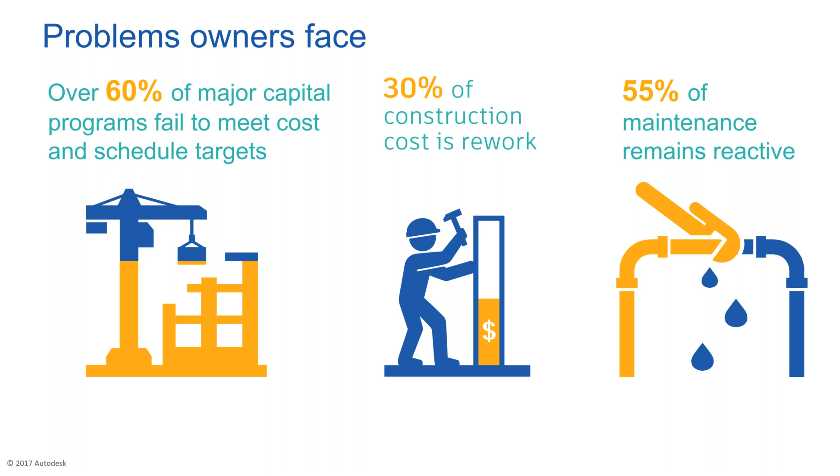So again, embracing BIM as a technology is giving us a lot of benefits. The first and foremost step towards BIM would be developing 3D models. Whether it is data capture, conceptual design, detailed design, or documentation for construction that reaches out to the site, it needs to be based out of a 3D model, because you cannot go wrong with a 3D model. So ideally, you have to embrace technologies such as reality capture and conceptual modeling tools to save a lot of time and money.

And the advantage for all the stakeholders of the project is once you start off your foundation as a 3D model, it gives better project insight. What a 3D model essentially gives as a byproduct is its cost, and you can also link time to it - you can timeline it for better schedule and constructability. Once this has been identified and concretized, the project can go on with a lot more predictability.

And what happens is, all through the project, the users are using the same kind of consistent data throughout the project. So there is no to and fro between the stakeholders with respect to project data itself. And time-boundness will be the norm of the day. If you see BIM projects, the way people are collaborating with each other, you can assign specific responsibilities to specific people to invoke prompt responses, so that there is no time lost.

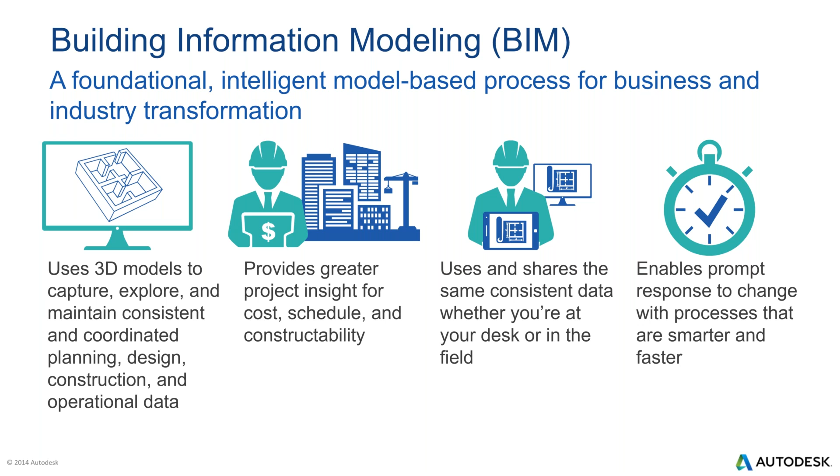So how does BIM empower the owners? Using BIM, you can improve the infrastructure quality. Most of the building systems have come into the BIM bandwagon. Many of them have got BIM mandates, so infrastructure is quickly catching up. We have seen many projects that have been started on BIM, airport projects, railway projects, even highway projects, being cited as BIM for infrastructure projects.

So for the predictability aspect of it, and to significantly reduce infrastructure lifecycle costs, as I already said. When you save a lot of money in terms of costing, timelining, and predictability of the project, you will also have better lifecycle costs as well. Many of them felt that they understood the project better right from the inception, well towards the end, and they could trace what's going wrong and make quick corrections.

Operational efficiencies as well. When it comes to the maintenance phase, people felt that having BIM models really helped them a lot in terms of maintaining the overall project. So overall, there's a lot of transparency, efficiency, and the quality is maintained when you embrace the BIM workflow.

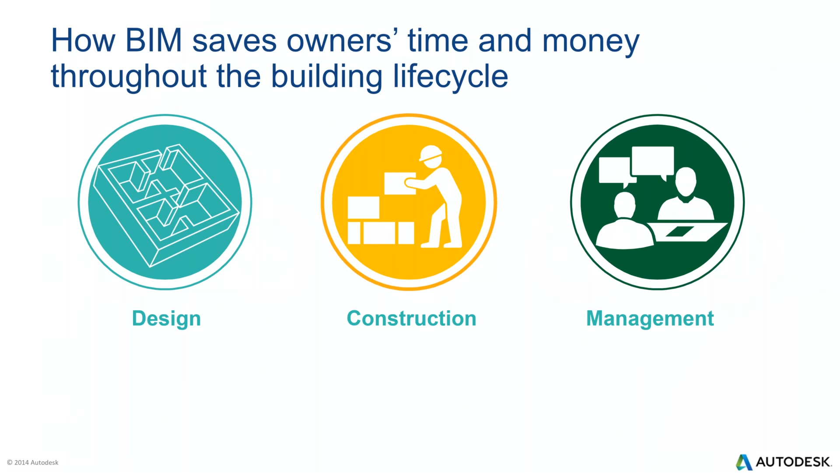So at the conceptual stage itself, what is the biggest advantage? Now, from an infrastructure standpoint, many of the contractors, design consultants and architects are using the power of InfraWorks. InfraWorks has the capability to quickly generate design options so that clients can take quicker decisions. Public opinion can also be quickly taken even before the project starts off. More often than not, we've seen the project getting delayed owing to public outrage or decisions taken by the clients or owners themselves. So this can be reduced a lot at a concept stage itself.

I suggest you embrace InfraWorks right from the word go, because it gives you better in-context visualization.

Coming to sustainable design as well, it doesn't only apply to buildings. It is a misconception to think that sustainability is only meant for buildings. No, sustainability can also be reflected in infrastructure projects. For example, if you have a lesser number of structures, or you have optimized materials, you're already sustainable. So if you plan well enough to avoid green spaces, or to avoid urban settlements, you're already sustainable.

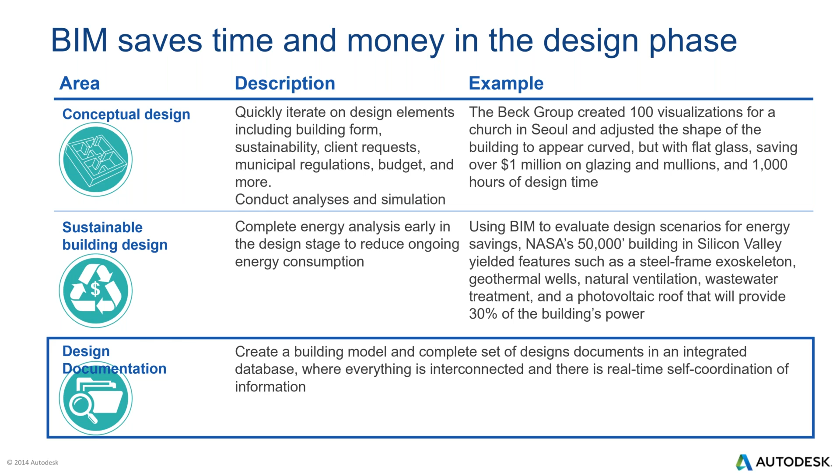So for construction as well, even before construction, what happens? A contractor takes into account the constructability of the design itself. He will go through a set of brainstorming sessions - whether the design is right, is it constructible, are there any complications on site. If there are complications on site, he will need to inform the designers, or in most cases it may be the EPC that is in charge. Communication should not go amiss along with project constructability.

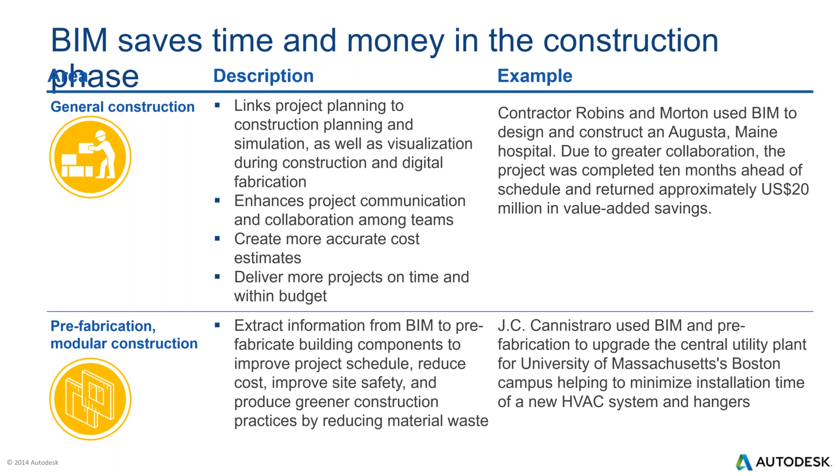And life cycle costs - say for example an infrastructure project, a township project has come up, and they want to extend the township project to a larger area. The classic example would be Chandigarh - its plans were extended into cities like Mohali and Panchkula. What if the data was already there with the designers? It would make their life so much more simple. So after the city model reaches a maturity level, it needs extensions or improvements, and this can be reused. The data produced in the first phase can be reused for remodeling and new modeling as well. So overall, the USP is to have a base 3D model right from the word go, right from the survey and conceptual design stage.

So what is the ROI, the return on investment on BIM? Generally it was said that Australia-wide BIM and virtual design construction across the supply chain could enhance industry productivity up to 9%, according to the study. But then some companies are reporting 500%, some companies are reporting 300% return on investment on BIM technologies. So definitely it is a win-win situation, where if you implement BIM on a project, it is bound to give you returns.

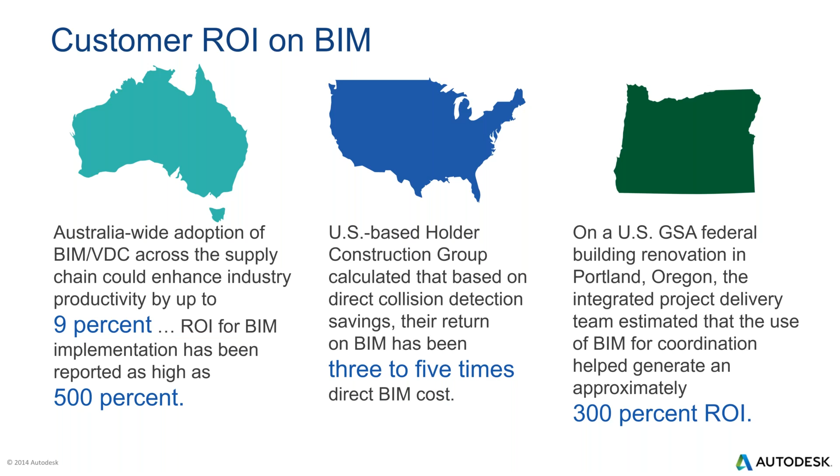And the future of the project lifecycle is going digital. In today's date, most buildings and infrastructure are being replicated in context so that you can better manage civil public properties or private properties, as the case may be. In the era of connection, you can have your entire city model on your palmtop - it is as simple as that. So the power of BIM also percolates into digital twins and digital systems for a better connected physical world.

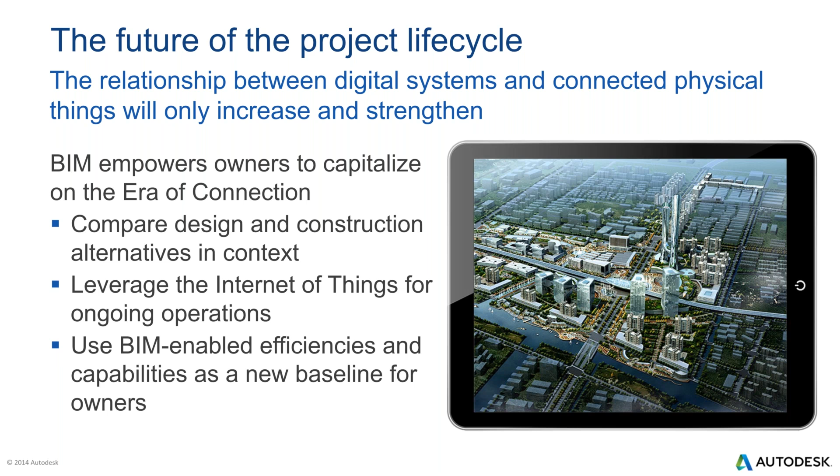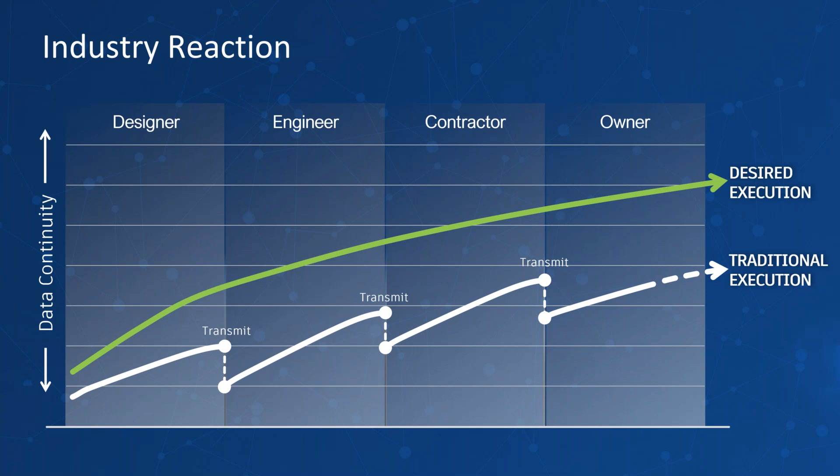So right from the word go, are we utilizing it? If you envisage a project, say for example you're working on a bridge project in our city, how are you going about the designs? Are you using InfraWorks? Even if you are using InfraWorks, are you communicating your design intent with your client? If you have started publishing your InfraWorks models to the clients to be seen on their desktops, you're already communicating in the right manner.

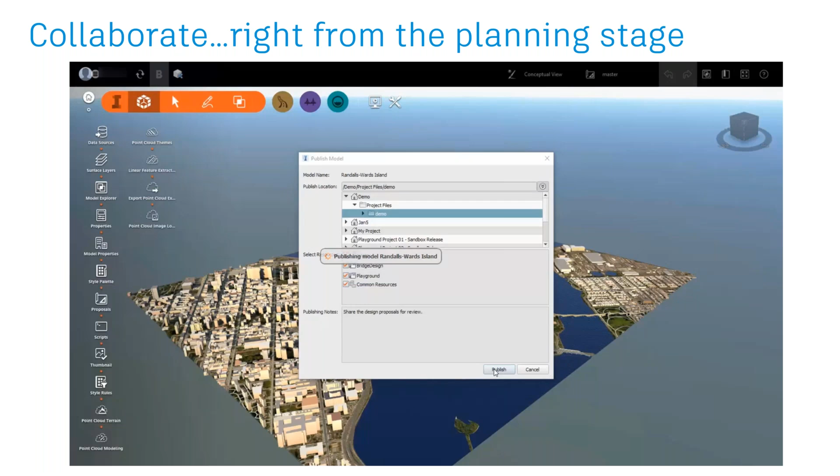InfraWorks models can be published over to BIM 360, or you can have an instance of InfraWorks models right when you create it. A model replication will happen in a BIM 360 environment as well, and from InfraWorks various stakeholders can come in and take a look - say bridge engineers, highway engineers, surveyors, all of them can have a look.

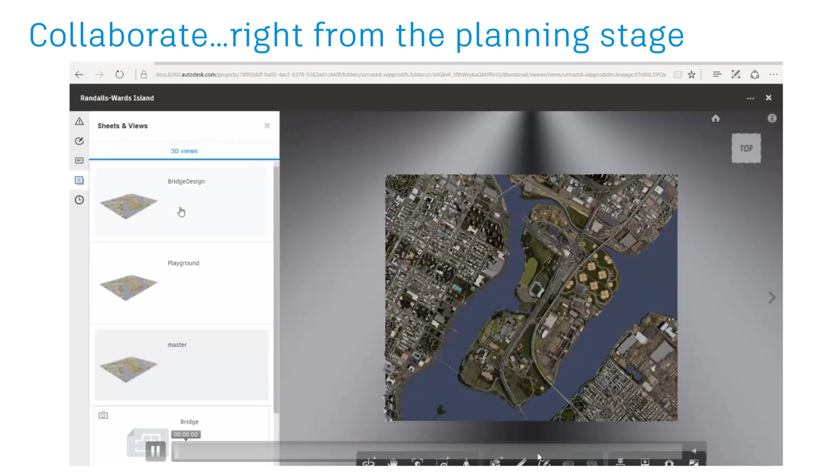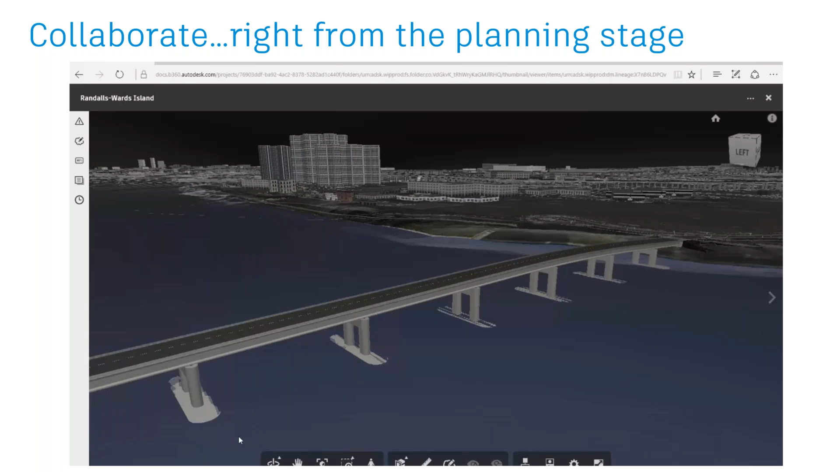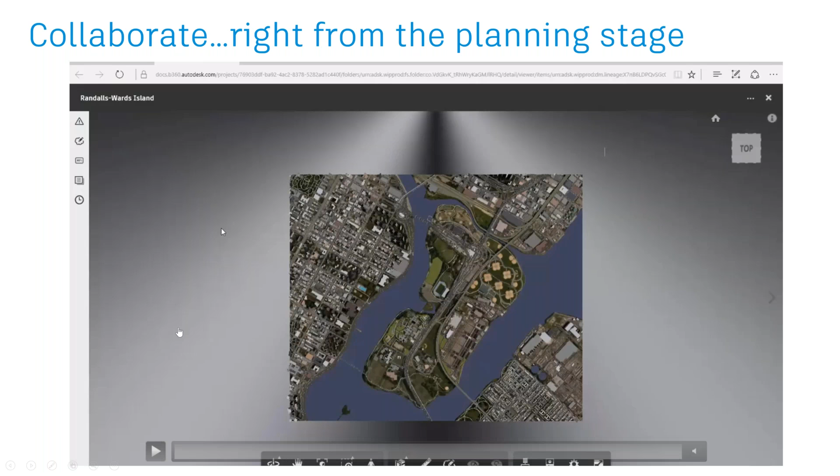If you have envisaged your project in terms of the existing ground, the structural design or the highway design aspects to various stakeholders, and showcased this, and worked on an agreement that this is the design to move forward with, it has already saved you a lot of time. This in turn will reflect on project cost overruns. Purely from an engineering consultant or architecture standpoint, this communication has already saved cost. So I insist that whoever is using InfraWorks start communicating through BIM 360 with your various project stakeholders, so that you have proper documentation of the communication on the design intent.

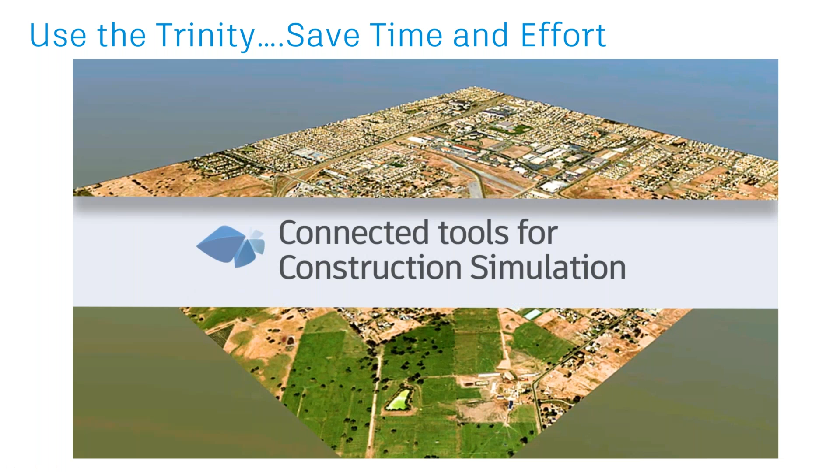Secondly, the Trinity - connected tools for construction simulation. When we go to a customer, we always ask - and you as customers should also ask yourselves - are we planning, designing, and engineering it in the right manner? Are we using the right tools? What I mean by the Trinity is a combination of InfraWorks, Civil 3D, and Navisworks.

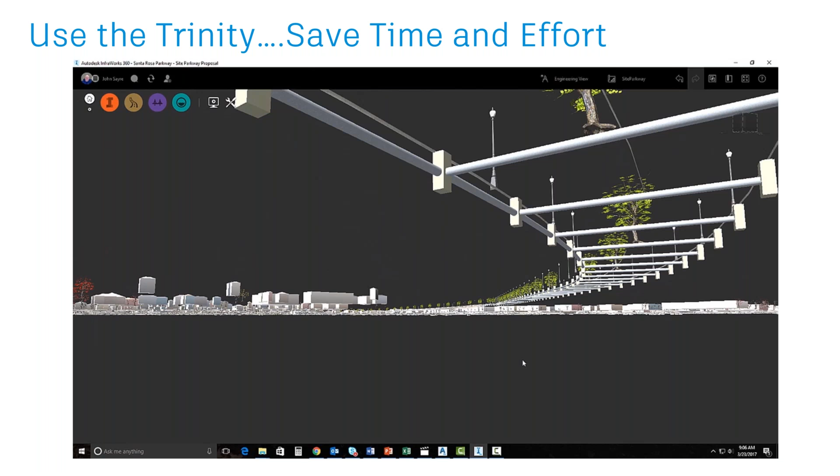As I told you earlier, initial concept designs - say for example stormwater drains - can be churned out quickly to save time in InfraWorks, and the model can be pushed over to Civil 3D. In Civil 3D you can fine tune it and churn out a string of documentation for this. Is everybody doing this? No.

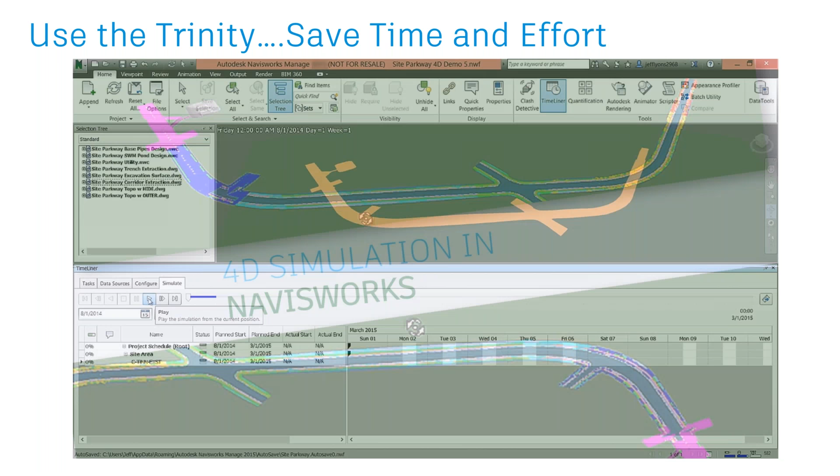Once Civil 3D models are ready, it can be pushed over to Navisworks for clash detection and timelining - you can also add the time factor. At this stage, many successful engineering firms, you name it - AECOM, Khatib-Alami, L&T - even before they churn out a model, they are developing clash-free models before it goes to construction. That itself is saving thousands and thousands of crores in terms of rework.

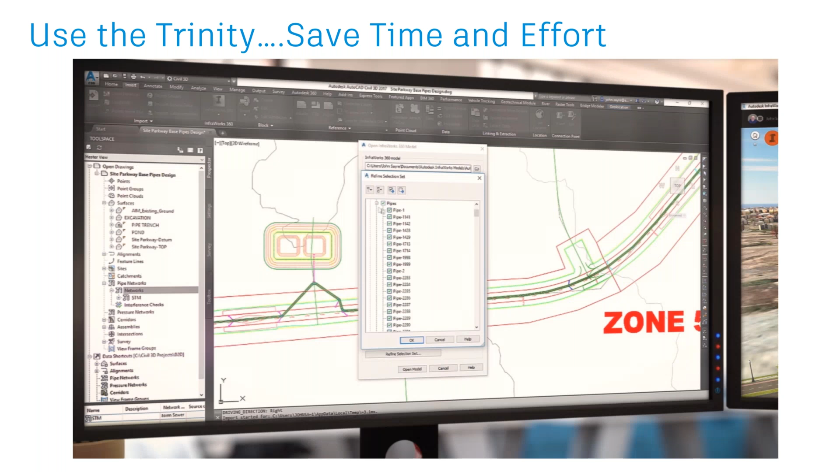So are we timelining it right, using the right tools? I suggest that if you want to start off on better cost, project predictability and outcomes, use a combination of InfraWorks, Civil 3D, and Navisworks. Obviously we might miss out on something else beyond that, so we will touch upon those points as well.

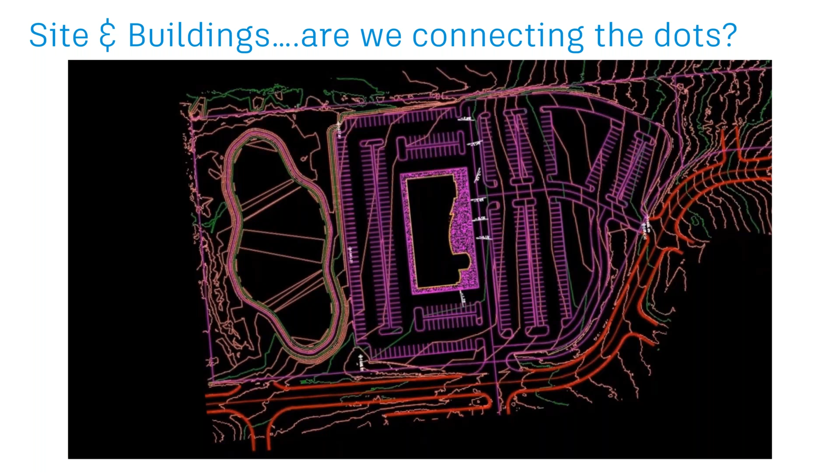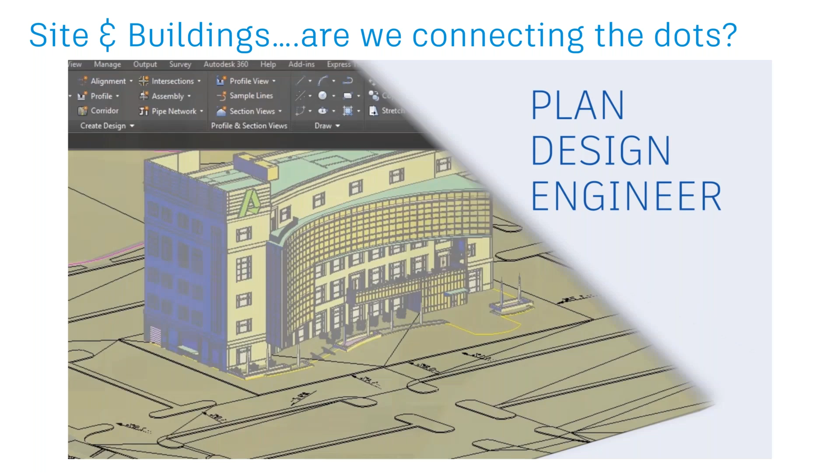What is missing in today's infrastructure industry? In the industry today, there is also a problem connecting sites and buildings. For those of you working in a multidisciplinary consultancy which houses architecture and civil engineering aspects as well, this is something you need to take a look at. Off late I was in Kerala meeting a particular client.

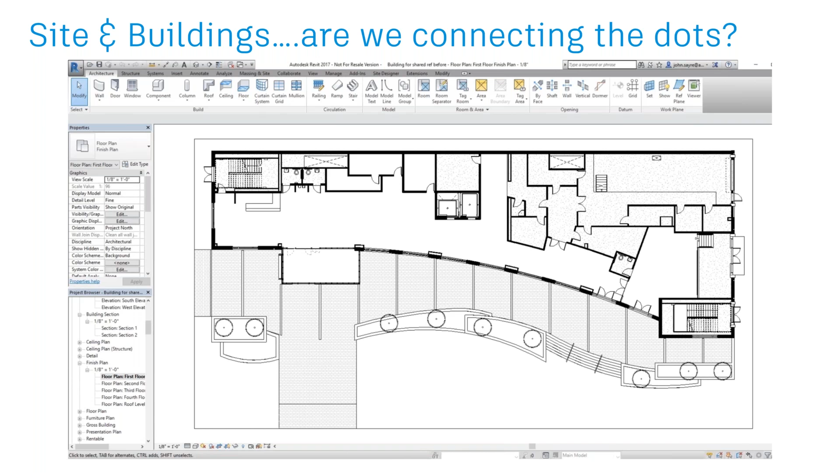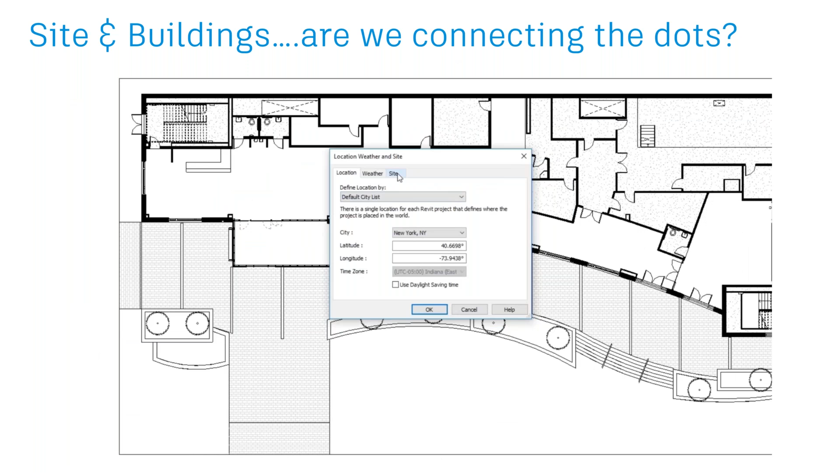They were saying that we are having problems sharing our Revit models onto InfraWorks or onto Civil 3D. How do we do it? If you've heard about shared coordinate systems in Civil 3D, which is respected in Revit as well, you can take any two points, reference it, and send it to Revit. You can align this Revit model to the exact geographic coordinate system so that there is no data missing - you know exactly where the project is coming up.

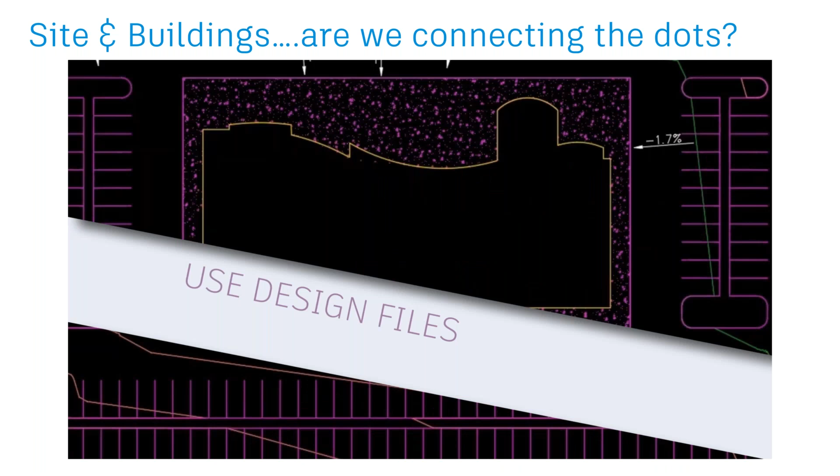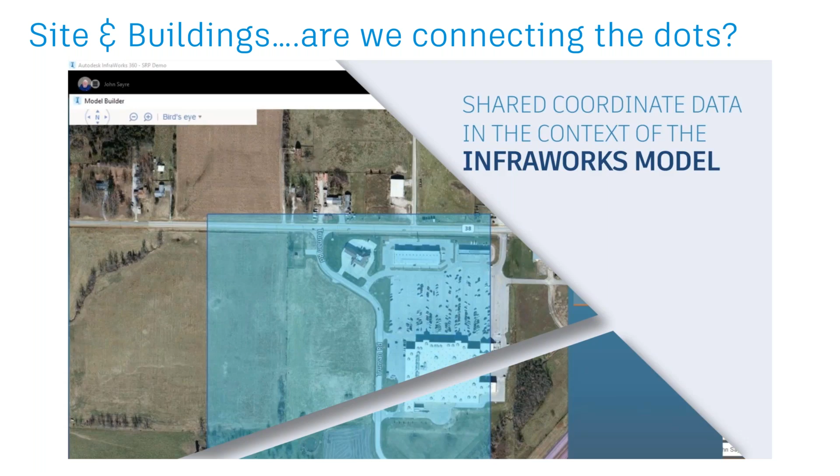Vice versa, once the design is complete in Revit, you can bring the Revit files back to the Civil 3D environment and utilize it in the native format or CAD format. Navisworks is the aggregator - you can have your ReCap models, Revit models, and Civil 3D models combined into Navisworks as well. The shared coordinate data in InfraWorks gives you the capability to combine the entire model - the civil model, the survey model, and the buildings model - all in one place, so that even if the aerial imagery is a little old, you will at least have the right terrain to start off with.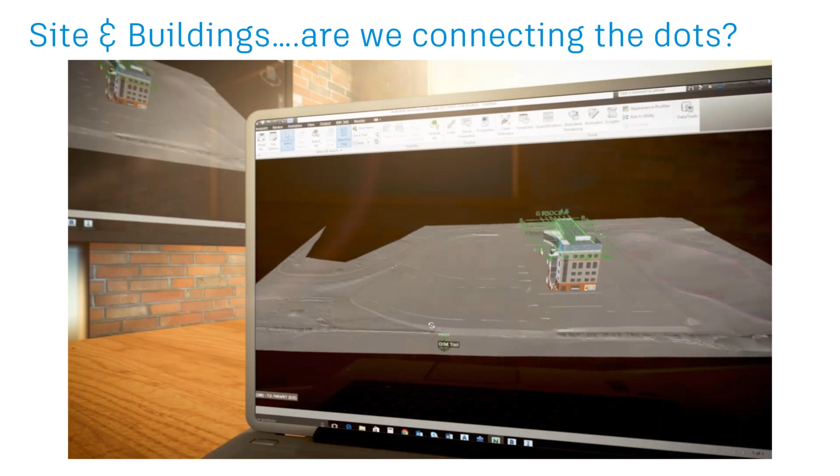With tools like AEC Collections, you can effectively utilize the workflow across Recap, Civil 3D, Revit, Navisworks, and then combine all these models into InfraWorks. So I would suggest you utilize a combination of these tools for site and buildings.

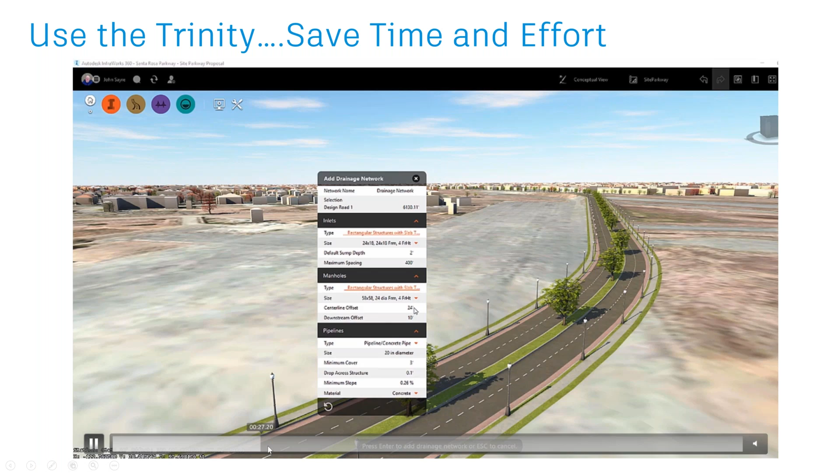If you're not doing it, please use the shared coordinate system. This is one of the most common queries we are getting today. So remember this in Civil 3D - I would always want you to share your coordinate system. For civil engineers and surveyors working with architects and other designers, share your coordinate system and then have the project started. If you've done this, half of your coordination issues will be resolved.

So we've seen that we can collaborate during the concept design stage, and we can collaborate or use effective tools at the design stage itself, like Civil 3D, Navisworks, InfraWorks, Recap, and so on.

But overall, what is the connectivity? Say, for example, the architect may be in Delhi, the civil engineer may be based out of Hyderabad, and the surveyors may be somewhere from Chennai, and they're trying to connect with each other. How do we link all these three people without any delay?

In today's date, if I were to sample a set of customers, they'd say coordination has become the biggest problem for us. We are sending out emails, WhatsApp messages, pictures over WhatsApp in order to coordinate with the project stakeholders, which is becoming increasingly difficult. So that led us to think in terms of connecting all the various stakeholders on a common platform.

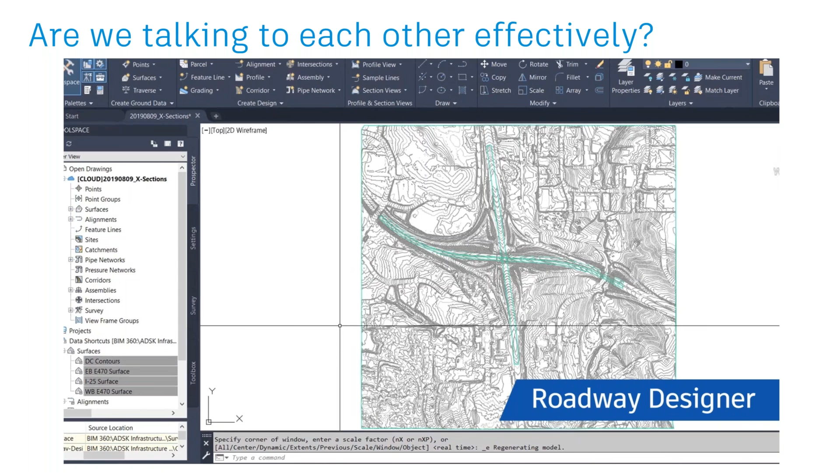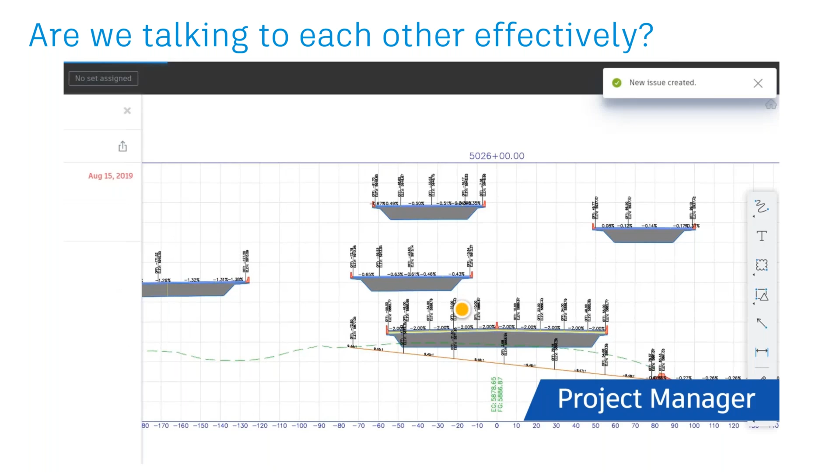Let's take an example. A surveyor publishes the project over to BIM 360. A roadway designer consumes the same model in his desktop Civil 3D, designs the roadway, and then the draftspersons or engineering tech team churn out cross sections from that referenced model, and the project manager reviews and creates issues if there are any design related problems. In this manner, you can effectively communicate with all your project teams without any delay.

So very recently we have released this BIM 360 design for Civil 3D collaboration. I suggest you start utilizing it because a number of things have been added. For example, you can now create data shortcuts - I'm sure most of you know about Civil 3D data shortcuts. I suggest you start creating data shortcuts on the BIM 360 design site itself and start consuming models right from there. This gives you a very streamlined method, and it also has many other features I'll explain in the next slide.

So I want you to take note of your project in this manner. If you're in design, authoring, collaboration, and detailing, are you using a multitude of products? Are you interacting with a lot of stakeholders in the project? Please utilize the BIM 360 platform. It is very data centric, and even at the pre-construction stage, you'll be able to take critical decisions on clash detection, constructability, and coordination, which saves a lot of project overruns.

In field execution itself, how you take the data to the field is a big problem for today's contractors or designers. How contractors are marking up issues to the designers is also a big communication gap, and we want to be able to resolve these issues. And for handover and operation, how as-built drawings are being assimilated and handed over also costs a lot of time. So all this can be considered for cost savings from an overall project lifecycle standpoint. I suggest you start off with BIM 360 design for Civil 3D collaboration.

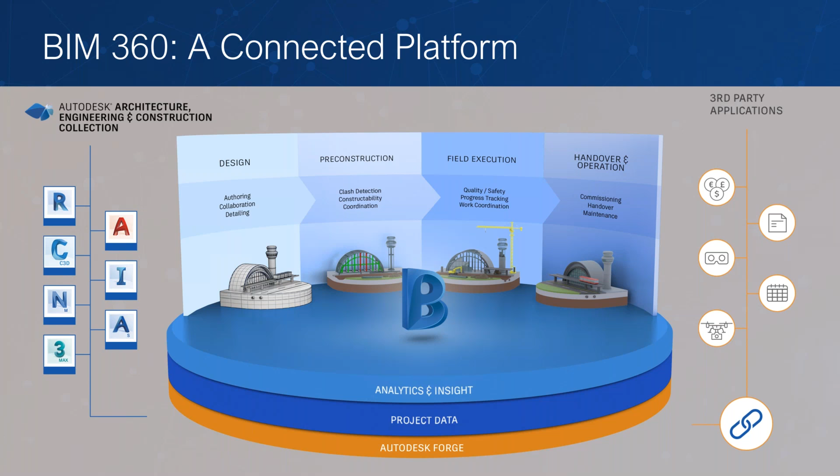Of course, there are also other third-party applications that can enrich the overall experience, but I won't go much into that. Let's see how design collaboration for BIM 360 design helps us in better collaboration.

Even before I start this off, I want to explain why I'm emphasizing BIM 360 design collaboration with Civil 3D. Communication between different stakeholders is becoming a major factor for project overruns, so we intend to resolve this first.

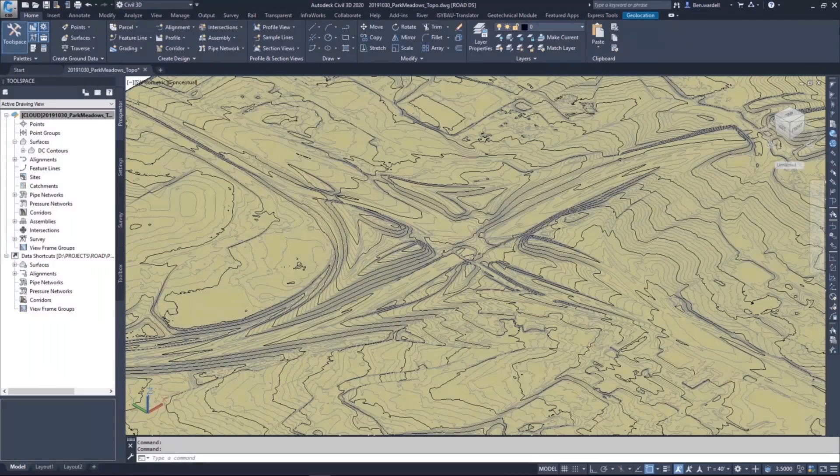What you need is Civil 3D 2020.2 in order to have this facility of BIM 360 design for Civil 3D collaboration. Once you install it, you need the desktop connector, and you can directly start creating data shortcuts. For example, a surveyor creates a BIM 360 instance for survey files.

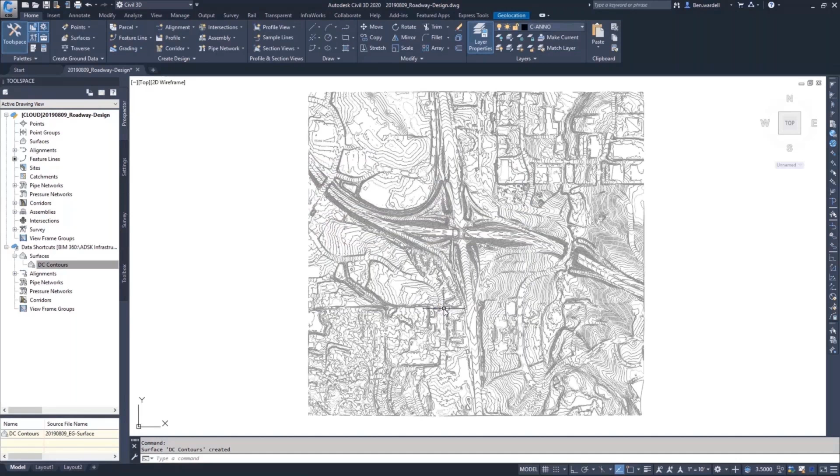As a project admin, you can create or add different project team members and assign them permissions. The beauty of BIM 360 team is that you'll have individual file level security - you can lock or unlock it for people's accessibility. Whether you're working with a number of project stakeholders or a particular set of team, you'll be able to effectively manage all the information.

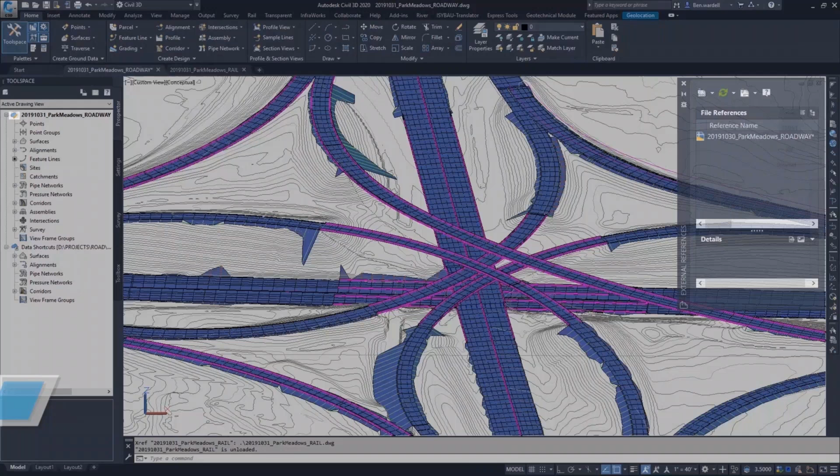Now we have version control. Earlier, version control for infrastructure projects was a challenge. Now you'll be able to identify versions between each other, and if you want to revert or restore to a previous version, that's also possible - similar to the buildings scenario.

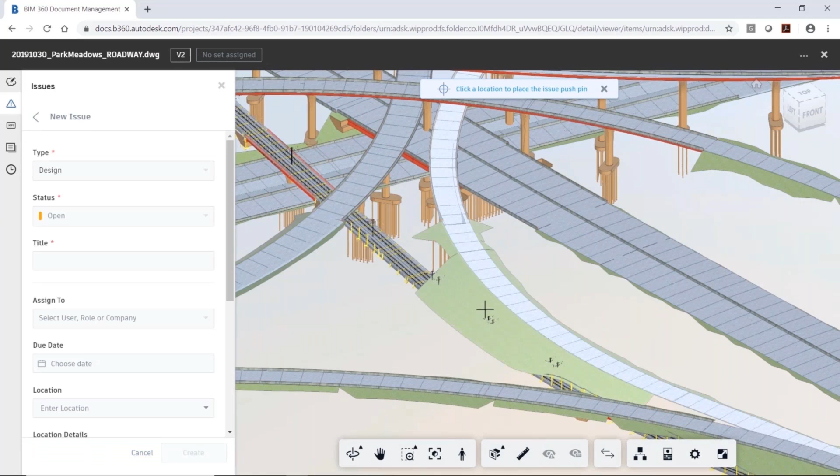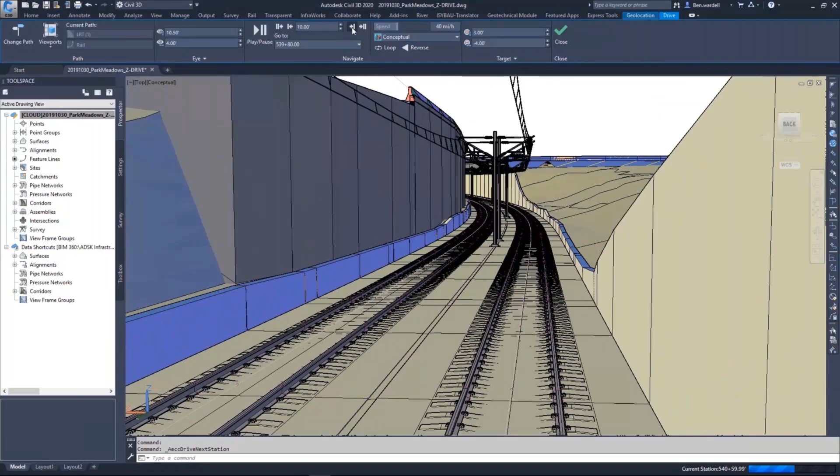For example, if you were the manager, you'll be able to identify, mark out, or create issues for that particular design and assign it to a particular person. That person gets an intimation saying this is where you have to make changes. You'll make the changes and then update it in the entire project. So there is no ambiguity in terms of who communicates to whom and who's got the responsibility of the design change or design model. This saves a lot of time in overall team collaboration.

Coming to the last bit, which is the real battleground, the field. We recently contacted a lot of infrastructure contractors and tried to understand what issues they're facing on the field. The first and foremost thing they came up with is documentation for design for construction - that ruled the roost when it came to the number one issue they were facing on field.

So are we, as designers, pushing the right information to the contractors to construct, or are the contractors giving us the right feedback with respect to what is happening on site? The designer also needs to understand from the contractor what is happening at site so that he can make the right design changes. Are these things coming in place?

So off late, as you know, Autodesk has procured a company called PlanGrid, which completely handles construction management, field management basically. The documentation is so simple to use that many firms are embracing PlanGrid for field documentation as well.

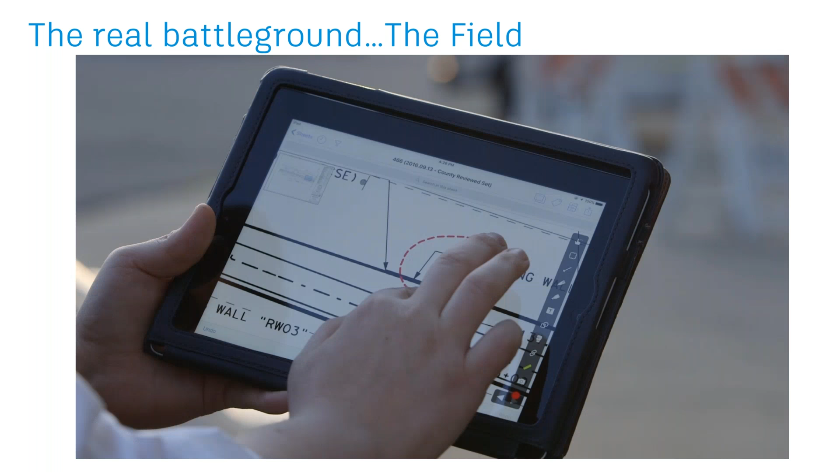So PlanGrid allows you, in a very quick manner, to access relevant drawings, the latest versions of the drawings. If contractors or engineers at field find an issue, they'll be directly able to mark up the issue and send it across to the designer. So the designer knows exactly where the problem is and what corrections he needs to make. This alone from the contractor side is allowing owners to save tons and tons of money.

So are we taking the right path in field documentation or field management? Please consider PlanGrid, because we've also come to know that if field documentation or field management is an issue, and you don't want to carry those A4, A1, A0 size sheets to the field and risk losing them or not finding sense in them, please consider carrying digital data to the field and make the difference in terms of communication.

PlanGrid is proven to have saved millions and millions of dollars for contractors and owners alike. So I suggest considering such solutions for better project outcomes.

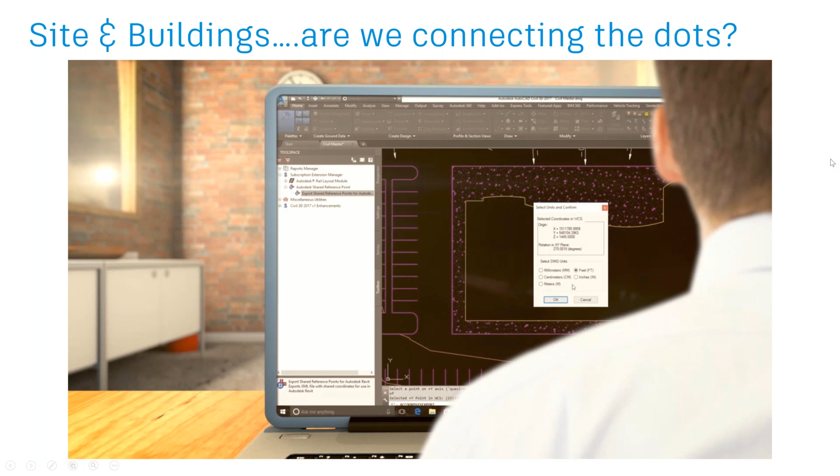You can either type this as a keyword at the command line, 'shared coordinate system'. The way it works is, if you see the window there - I don't know if you can see it at this juncture - you will need to take any 2 points. Export. You see that in the Autodesk shared reference point in the reports toolbox. You can right click and take any 2 points in the Civil 3D drawing and then export it to Revit. That's how it works. I hope I answered your question, Savita.